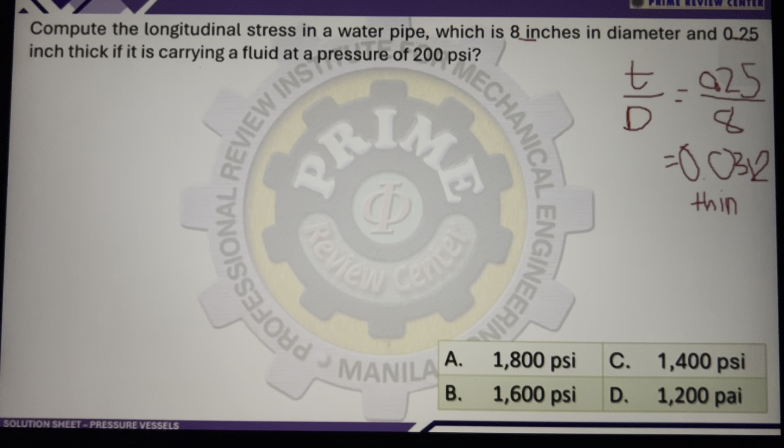So alam natin na kapag ang ratio na to is less than 0.05, then we can assume that this is thin wall. And so anyway, we know that this is thin. Kung thin wall to, ibig sabihin, we can use yung equations ng thin wall for the longitudinal stress. Okay, so ano ba yung equation ng longitudinal stress? That is PD over 4t times efficiency ng joint.

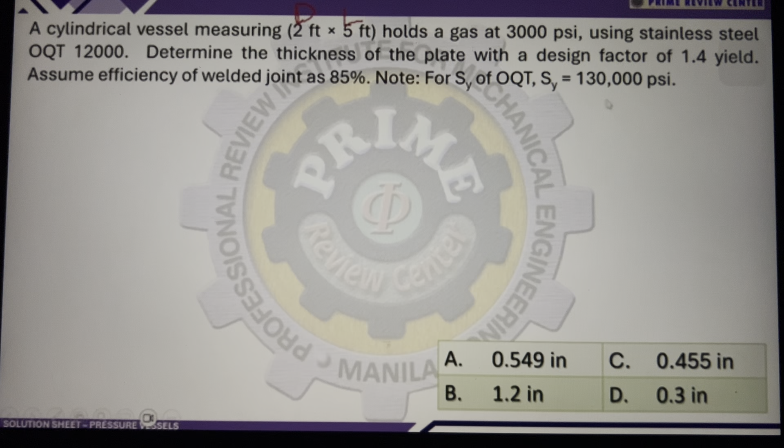So tulad nga nabanggit ko kanina, commonly when we are solving yung thickness ng plate, we always determine yung equation sa hoop stress. And hoop stress is basically tangential stress, PD over 2t times efficiency ng joint. So from the problem, meron tayong design factor. So yung tensile stress, i-divide natin yung yield sa factor of safety. So yan yung allowable, that is yield over factor of safety.

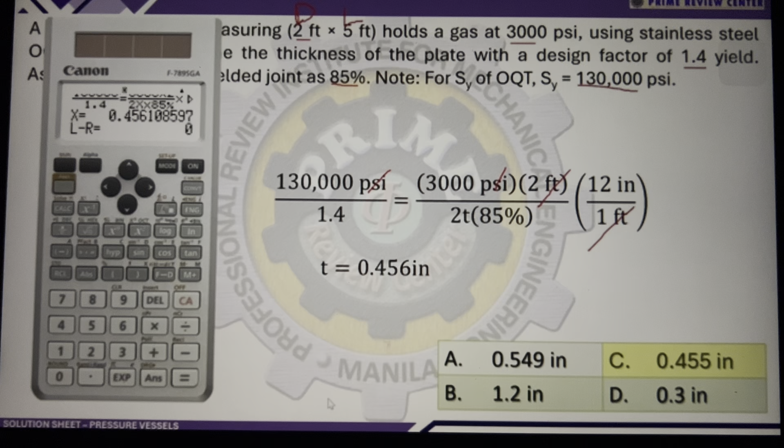So, another problem sa ating thin wall pressure vessel. Basahin ko lang. Seamless cylinder with a storage capacity of 0.025 cubic meter is subjected to internal pressure of 20 megapascal. The length of the cylinder is twice its inner diameter. To calculate the thickness of the cylinder, it is made of plain carbon steel 20C8, given ka ng ultimate na 390 megapascal and a factor of safety of 2.5.

So, katulad ng mga ginagawa natin, pag naghahanap ng thickness, we always use yung equation ng hoop stress. So, yung hoop stress is basically PD over 2t times efficiency ng joint. And so, from the problem, meron nga tayong factor of safety, then we needed to get yung tangential as equivalent sa allowable stress, which is also equivalent, since given ka ng ultimate dito, ultimate over factor of safety. So, kung ano ba ang given, ultimate yung ilalagay. Kung yield naman ang given, edi yield din ang lalagay. So, since sa problem ang given sa atin is ultimate, edi yung gagamitin natin is ultimate stress.

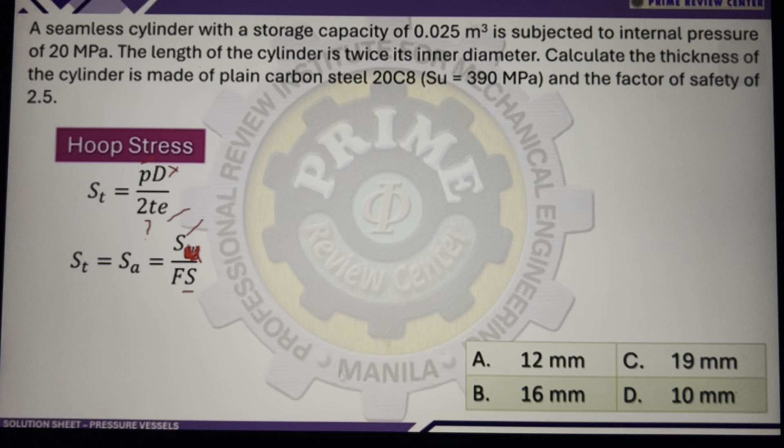So, ultimate strength, factor of safety is given. Yung pressure natin is 20 megapascal, yung diameter wala pa, thickness yan yung hinahanap. Efficiency ng joint, wala nang binigay. So, therefore, pag sinubstitute natin, ganyan yung lalabas. So, the problem on this solution, yung diameter natin, wala pa tayo nito. Tapos yung thickness yan yung hinahanap. So, meron kang dalawang unknown. But, in the problem, binigay daw yung length is twice ng inner diameter. So, meaning, related yung diameter sa length.

So, from the problem, we are given the volume of the cylinder. So, kung may volume tayo ng cylinder, we can determine its diameter and its length. Diba? So, ang volume ng cylinder is basically pi over 4 d squared times yung length. Yung right circular cylinder natin. So, pi over 4 times diameter squared, that is the area ng bilog, times yung haba niya, yung length. And from the given on the problem, meron tayong volume 0.025. And yung length daw ng cylinder is twice ng inner diameter. Itong length, pwede mong palitan ng twice the diameter. Magiging 0.025 cubic meter is equivalent to pi over 4 d squared times twice ng diameter.

So from this, we can determine the value of the diameter natin. Lagay lang natin yung values. 0.025 is equivalent to pi over 4 times the diameter squared times twice ng diameter. Then, shift solve lang natin. Pag nakuha na natin yung diameter, that is 0.25 meter, we can now determine yung thickness natin. So, this is meters. Kaya papalitan natin ng millimeters yan para yung unit ay diretsong millimeter. Alam naman natin na 1 meter is 1,000 mm. So, multiply lang natin ng 1,000. So what we would get is 251.54. So that is approximately 250 millimeters.

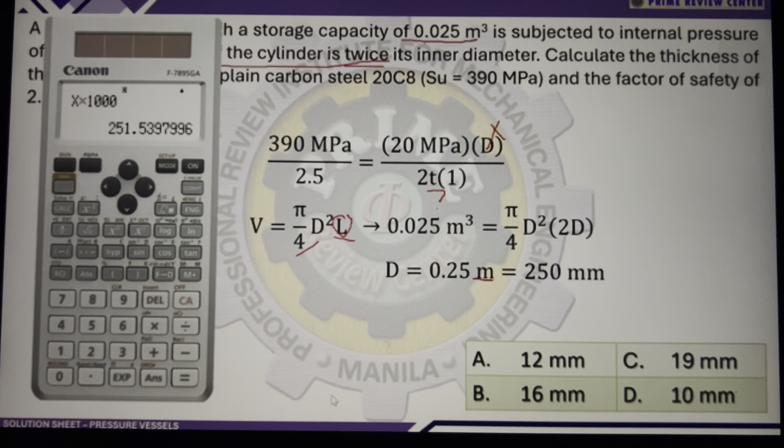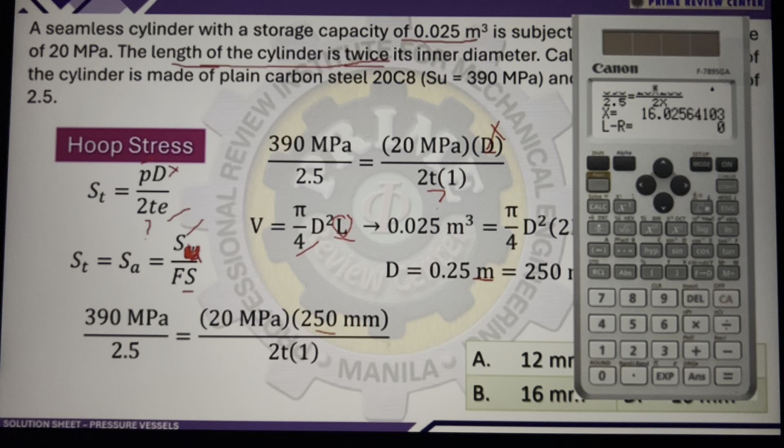So pag meron na tayo nito, then we can now substitute yung value ng diameter natin dun sa equation, so makuha na natin si thickness. Meron na tayo ng diameter, 250 millimeters. Pwede na natin yan i-shift solve. Sa calculator, 251 yung nakuha. Either way naman, pwede nyo gamitin yung nakuha or yung round-off value. So this is 390 over 2.5. By the way, pag chinek nyo yung units, yung megapascal will cancel out, and ang matitirang unit lang dito ay millimeters. So, when we press shift solve, antayin lang natin. Makuha na natin yung value ng thickness, that is 16 millimeters. So, the choices, yung letter...